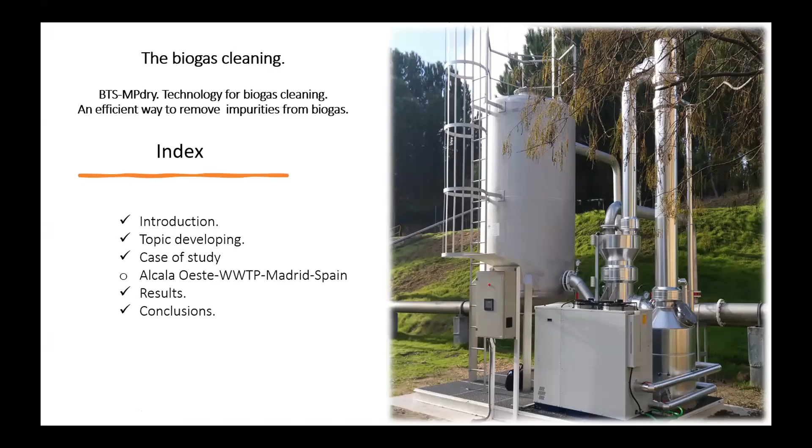When we talk about a biogas plant, we can distinguish different parts inside it: in this case, biogas production, digestate treatment, and gas purification. Take into account that when the biogas comes out of the biodigester, it is a dirty gas that requires prior purification to be used as raw material for energy production by combined heat and power, or to produce other products like biomethane, methanol, and hydrogen.

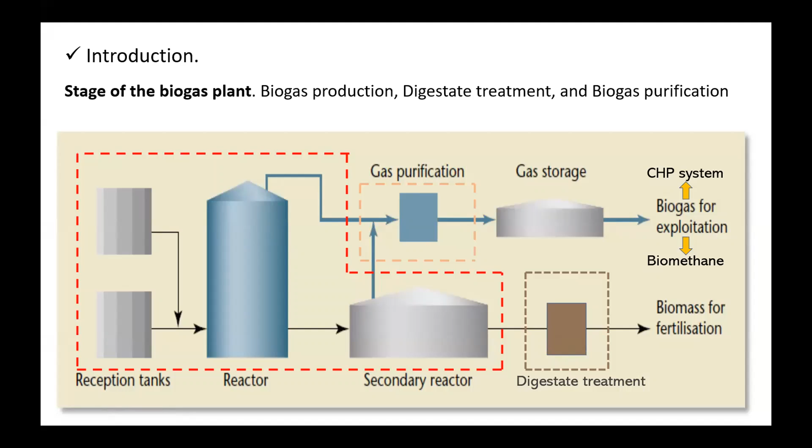What is the topic really about? There are different definitions or concepts about biogas, but from a technical point of view, biogas is a gas mixture that has two main parts. One part is the very important part that contains methane and other components like CO2, nitrogen, oxygen, and so on. The second part is related to dangerous components or pollutants inside the biogas, like hydrogen sulfide, water vapor, siloxane, and hydrocarbons. All these traces are dangerous for any application. Therefore, this gas is considered a dirty gas. It requires prior cleaning in order to be used as raw material for energy production or for other products.

Currently, according to the production source or its origin, we can find two kinds of biogas: biogas coming from uncontrolled processes, for example landfill, lakes, and swamps, and biogas coming from controlled processes, for example wastewater treatment plants, and so on.

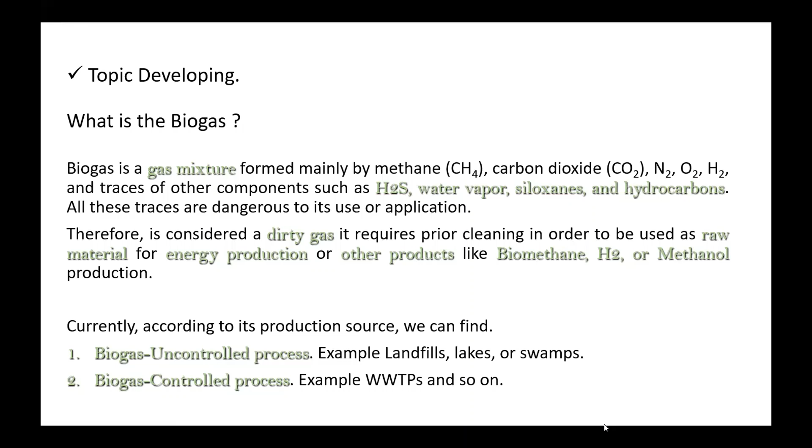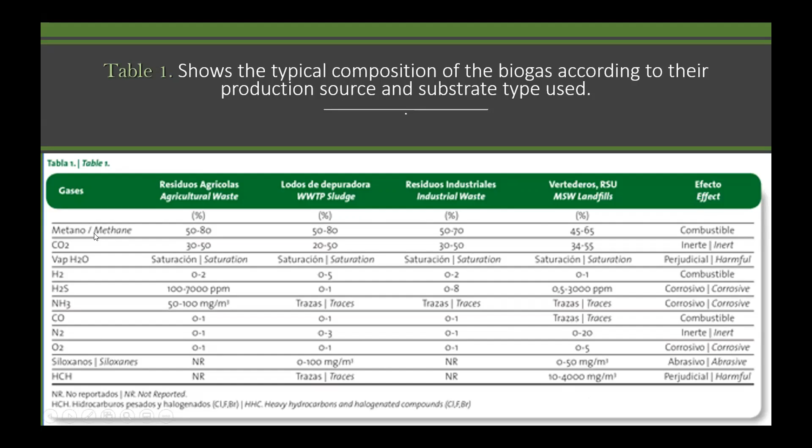In this column appear the different effects that the different components of the biogas have. What kind of impurities do we find in the biogas stream? Whatever its origin or source, the biogas, I repeat, is a dirty gas. In the biogas, two types of impurities appear.

External impurities are not part of the biogas fluid itself and are generally removed by mechanical operations like filtration or changes in the dimension or direction of the biogas fluid—for example, sediment, foam, particles, and condensates. These impurities are mainly found in the biogas when the biogas stream leaves the digester, mainly in wastewater treatment plants. This type of biogas cleaning is defined as gross removal.

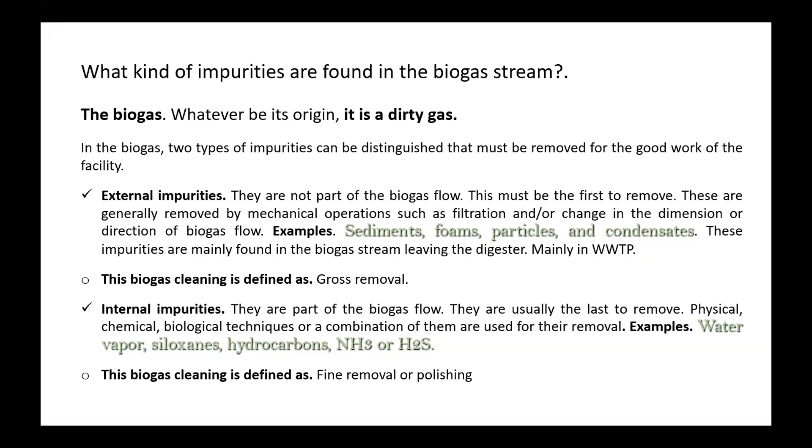The second type are internal impurities. They are part of the biogas fluid and are usually removed last, by different techniques such as physical, chemical, biological techniques, or a combination of these. Examples include water vapor, siloxane, hydrocarbons, ammonia, and hydrogen sulfide. This type of biogas cleaning is defined as fine removal or polishing from biogas.

Water vapor or humidity decreases the lower heating value and allows the formation of corrosive acid production, such as sulfidic acid. Its accumulation causes blockage in pipes, and when we work at low temperature, or when the season is winter, it could provoke ice formation.

Another impurity is hydrocarbon. There are two types: halogenated hydrocarbons, mainly those with chlorine and fluorine, that cause corrosion in different parts of the machine.

Heavy hydrocarbons, when the concentration is high, more or less higher than 3,000 milligrams per normal cubic meter, can produce failure in the engine, and are also mainly responsible for the presence of aldehyde.

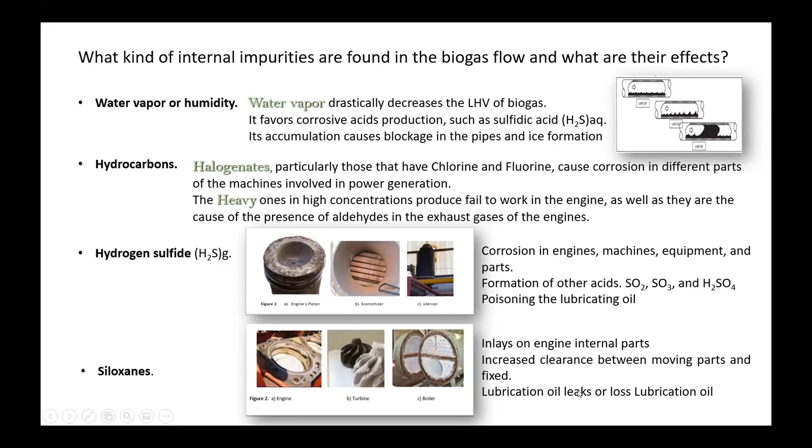In the case of siloxane, it lays on the internal parts of the engine, increasing the clearance between moving parts and fixed parts, causing lubrication oil leak or loss of lubrication oil.

That's completely it. What are the biogas cleaning techniques currently available in the market?

Currently there are three kinds of biogas cleaning techniques: specific technique, general technique, and combined technique.

The specific technique removes only one component, for example H2S removal, water vapor removal, or siloxane removal.

In this case, we have biochemical scrubber, dryer, membrane, etc. technology.

For the general removal, more than one component is removed. In this case, adsorption on active carbon allows simultaneous removal of siloxane, halogenated hydrocarbon, hydrogen sulfide, humidity, and so on.

The combined technique works simultaneously, for example drying with active carbon. This is our technology, BTS-MPdry, combining desulfurization, drying, and so on.

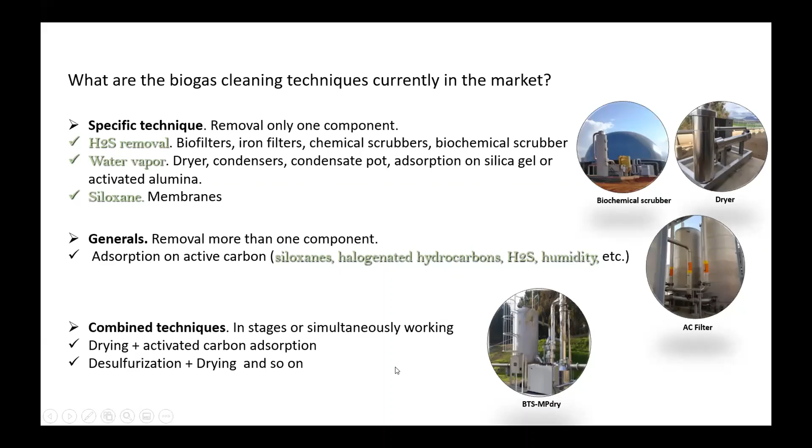What are the parts of the biogas cleaning facility? There are three main parts of the biogas cleaning facility or purification technology: biogas desulfuration, biogas drying, and biogas polishing.

Biogas desulfuration is H2S removal. This can take place in source, that is in origin, for example chemical dosing over the digester, oxygen or air injection, thermal or biological hydrolysis.

In the biogas line, the desulfuration is over the biogas flow. In this case it's useful for wastewater treatment plants, landfills and so on, and could be done by physical, chemical, biochemical, and biological techniques. The other part of biogas cleaning is biogas drying.

This is water vapor removal, another component, when you work at temperatures below 10 degrees Celsius, for example removing volatile organic compounds, hydrogen, siloxane, depending on the working temperature. Condensation and drying techniques are the most commonly applied in this case.

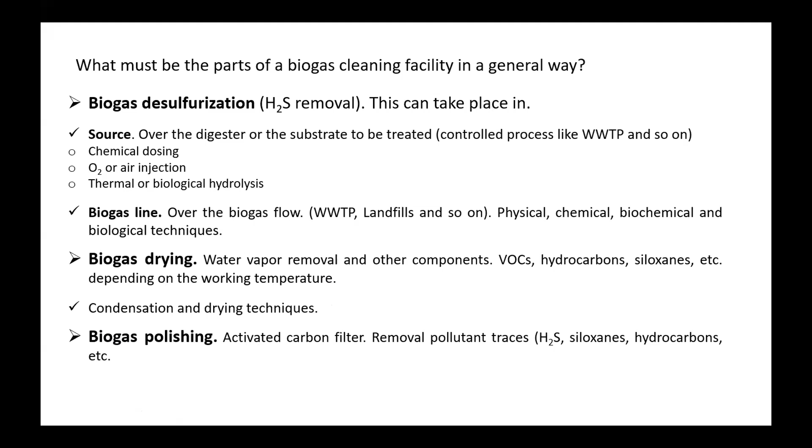Biogas polishing is mainly done by active carbon filter, to remove all the pollutant traces, like hydrogen sulfide, siloxane, and hydrocarbon.

This is the case study of the wastewater treatment plant Alcalá Oeste, Madrid, Spain, and this is the technology. It's a combined technique. In this case, it combines drying with active carbon.

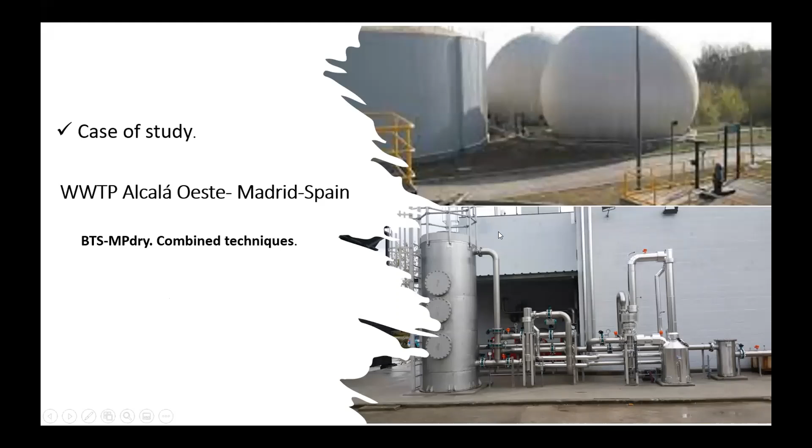This is the flow diagram of this technology. As you can see, it has two main parts: this part related to drying, and this part related to polishing, or biogas polishing, which in this case is absorption in active carbon.

In this case, the cooling in the drying system has to be done in two parts. Cooling is based on energy recovery with water, and by the cooling system. The cooling system has two parts: thermal cooling and mechanical cooling, combined with condensation and mist or droplet separator.

In this case, the biogas flow enters and gets into the drying system for energy recovery, using the cooling biogas to cool the biogas.

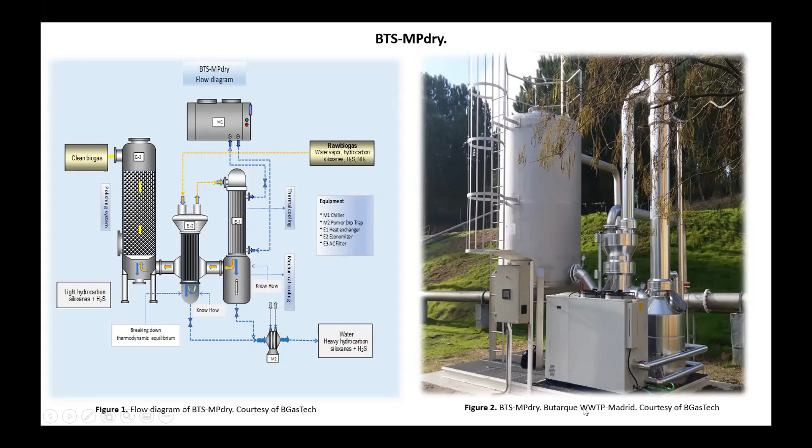The economizer is a main part of this system because it warranties to minimize the energy consumption of the chiller, often used in the drying equipment. This is a typical use under the following condition: high biogas flow, more than 500 normal cubic meters per hour, and high biogas temperature higher than 45 Celsius degree.

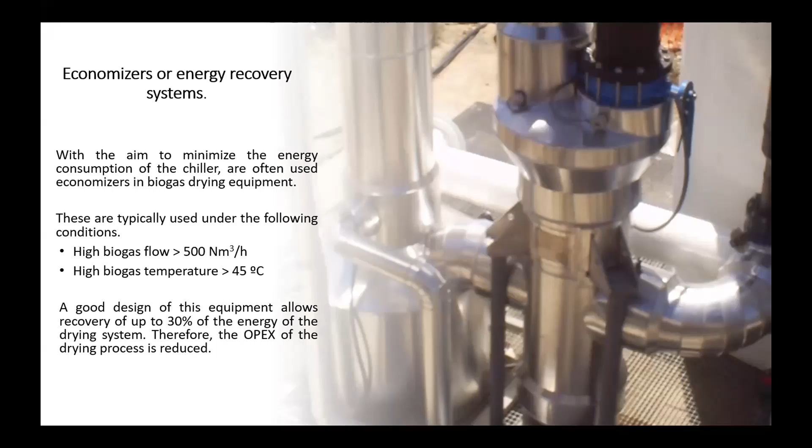A good design of this equipment allows recovery up to 30% of the energy, and for that reason, the OPEX of the process, mainly of the drying process, is reduced.

The design condition that we take place to do this technology is, for example, in the case of Alcalá Oeste, Madrid, Spain: biogas flow 360 normal cubic meters, biogas temperature 38 Celsius degree, biogas pressure 30 millibar, and the temperature of the technology working is around 2 Celsius degree.

In this case, based on our research and different tables that appear in different articles, working at 2 Celsius degree we can get water vapor removal around 34 grams of water vapor per normal cubic meter.

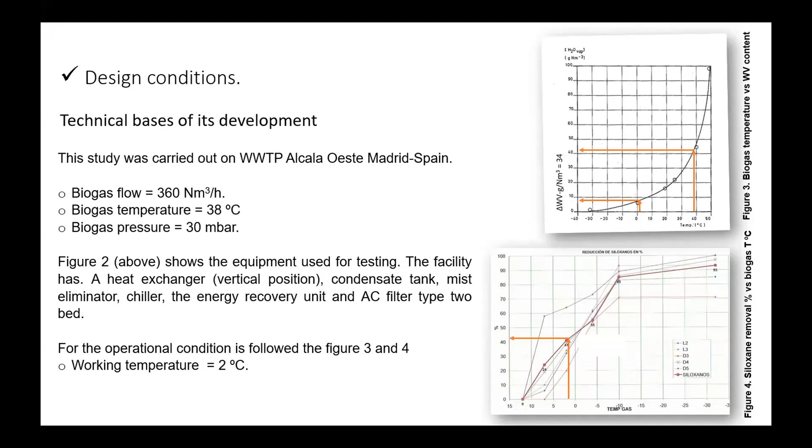Working at 2 Celsius degree, in this case we can get up to 40% removal of siloxane, mainly L2, L3, D3, D4, and D5. This is the fundamental of the design of operation of this technology.

And below, you can see the pollutant removal, in this case hydrogen sulfide, mercaptan, siloxane, and volatile organic compound. You can see the removal of water vapor reaches 91%, hydrogen sulfide 97%, siloxane 80%, and volatile organic compound 100%.

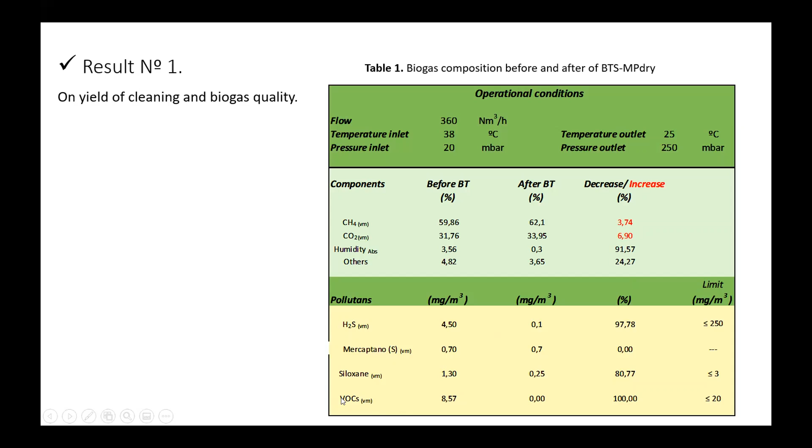Related with the exhaust gas, mainly these three components appear in the exhaust gas: SO2 decreases, SO3 is not reported in this case, the VOC increases in this case, but this is due to the oil of the lubrication, and aldehyde is due to the oily lubrication too.

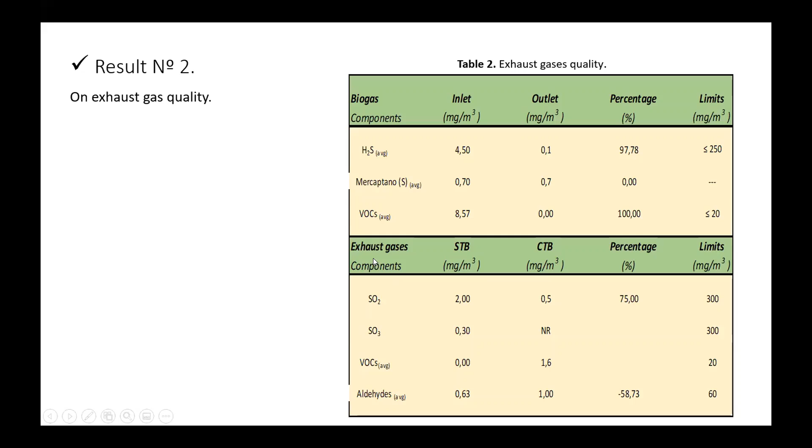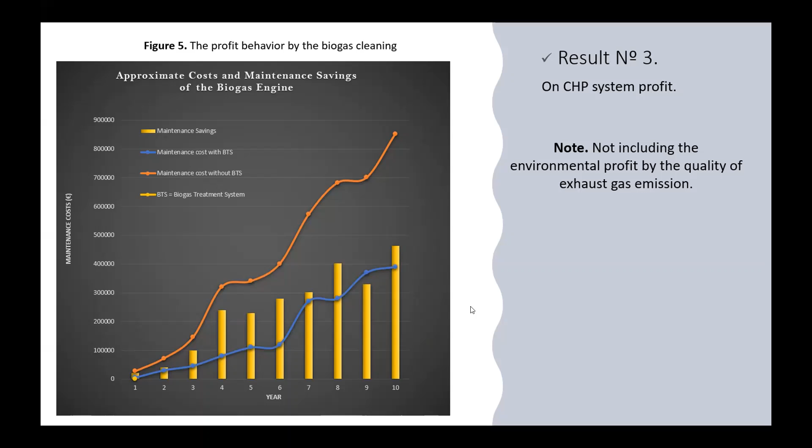As conclusion, with biogas cleaning the following profits can be achieved: optimal machine working, reduced maintenance costs, longer useful life of the machine and equipment used for pumping, capture and compression, and improving exhaust gas emission of the engine, and saving staff work due to avoiding concentration of toxins harmful to humans, mainly aldehyde and hydrogen sulfide.

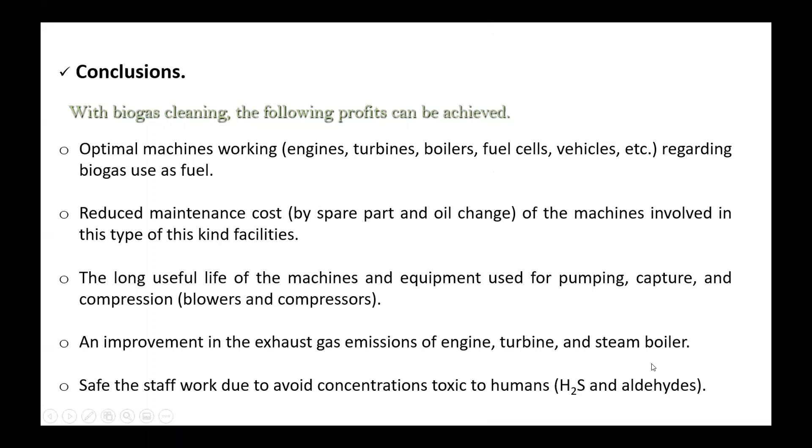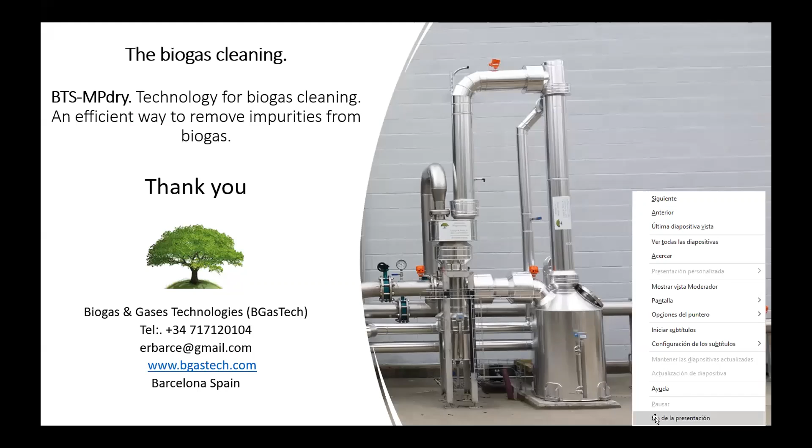Yes, thank you very much, Mr. Joaquín. Is there anyone to ask questions on this presentation? This is not, I want to continue with Rakeb Kifel. Rakeb, are you ready with your presentation? Rakeb Kifel. Yes, Hans, I hope you are ready with your presentation. Yes, yes, keep on going with your presentation, Mr. Hans. Thank you, Mr. Joaquín, thank you for your presentation. Yes, Mr. Hans, you can continue with the presentation. Mr. Hans. Yes, is there anyone?